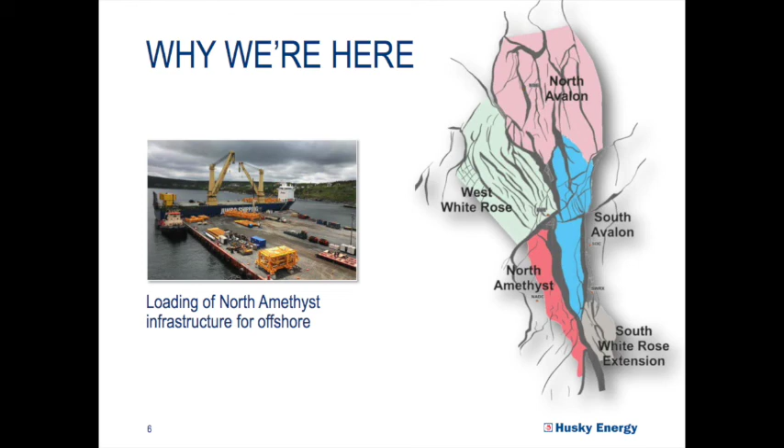We're doing something different in the West White Rose, and now we'll start talking about some of what we're doing different. The public review process has already been mentioned. We're in the 90-day public window of review. Your comments, both submitted on the website and submitted in these sessions, this being the fourth of four, will be used. The report will be prepared by the Harris Center. It'll form the basis of hopefully a recommendation by the board to the governments to approve our development plan. We would anticipate that approval, assuming our process goes forward smoothly from this point, later this year.

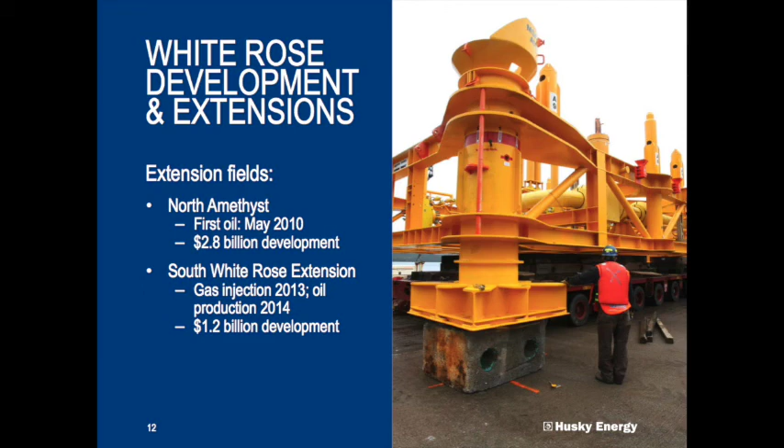The two extensions: I mentioned the extensions to the south - North Amethyst, May of 2010, a $2.8 billion development. South White Rose extension, in 2013 we put in half of it, and then this summer we're putting in the second half of it. But again, these are subsea extensions.

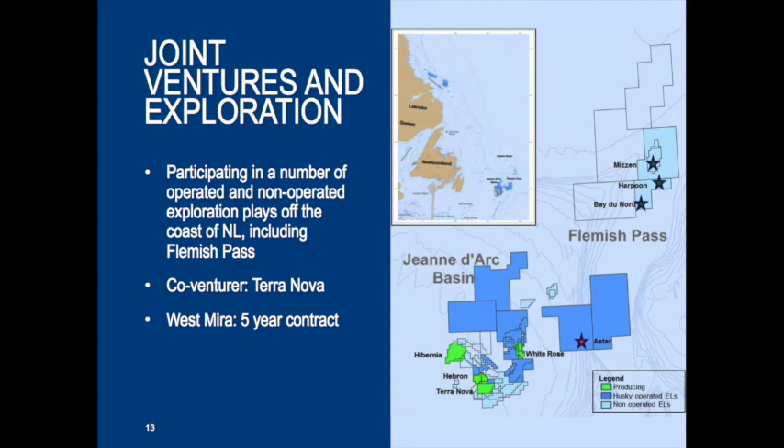We also have several other things going on. We're a partner in the Flemish Pass discovery with Statoil. You can see it here on the slide. We also have recently signed a 5-year contract on the West Mira, which is a new build rig that's coming hopefully next summer to the region to drill wells in the basin.

Another important part of it is not only how we deal with our daily operations, but it also gives us guidance on how we design our facilities. We call that process safety, and it's something we incorporate into our day-to-day design. So when we're looking at building something, it gives you guidance on the process safety, how we build that in such that it will be operated and function properly for the safety of our environment, people, etc.

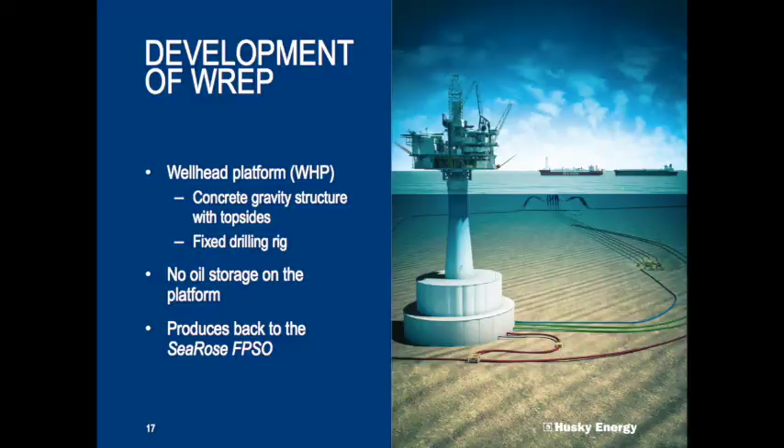There will be living quarters on it, there will be people living on it. A key difference, as highlighted on the slide, is there's no oil storage in this facility. The current facilities that exist, Hibernia for example, Hebron being built, they have oil storage or will have oil storage. We have no oil storage. Why? Our oil will transit over to the FPSO and be processed there. We don't need additional processing facilities, we don't need additional storage. It's already there. So that's a distinct difference between what we're doing and what the other projects are currently working on.

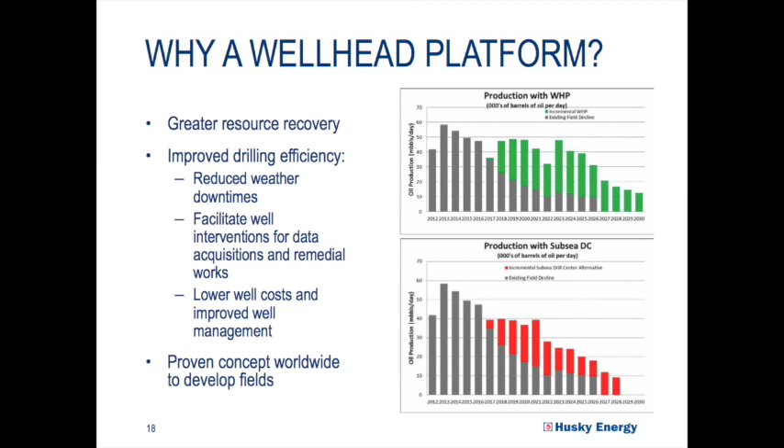Obviously, wellhead platforms are not a new concept. We're using it a different way here on the Grand Banks - that's our plan, but these are proven concepts. The wellhead platform is a proven concept that's been used around the world for a long time.

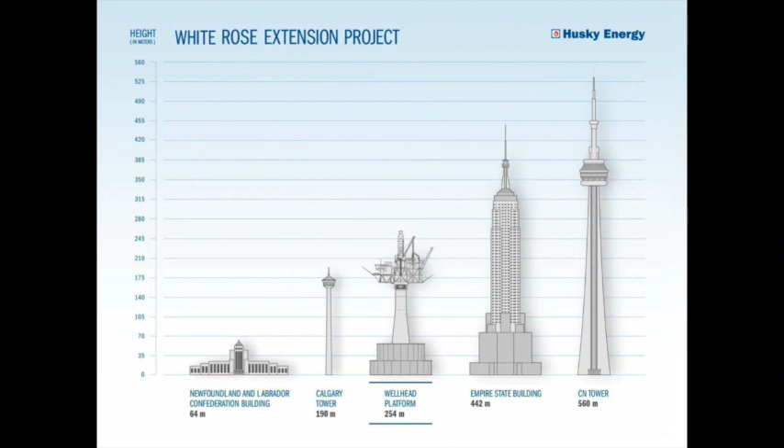Size of the wellhead platform - it's 254 meters, and you can see how that compares to the Calgary Tower immediately to the left on the slide, and the Empire State Building. So 254 meters, it's a very tall structure.

Another thing we like to talk about is the schedule - when are we going to do all of this? We've commenced construction of the graving dock, which we call early work. I'll reiterate, the project has not been sanctioned. We do not have full formal approval to do the project yet. We're progressing part of that process, but we did get approval to kick off the graving dock down in Argentia - basically the large hole in the ground where the graving dock will ultimately be built - and that has commenced construction and is currently ongoing.

Upon seeking approval of the development plan in late 2014, we would then kick off construction of the CGS - the structure that the topside sits on - and then construction of the topsides. Then significant work would be done in the summer of 2017, when we envision taking the CGS to the field, bringing the topsides to the field, mating them, setting the topsides on top of the CGS, and getting that facility up and running to commence drilling late 2017, hopefully starting our first well. So that gives you an idea of the schedule, what we're trying to achieve with our timeline.

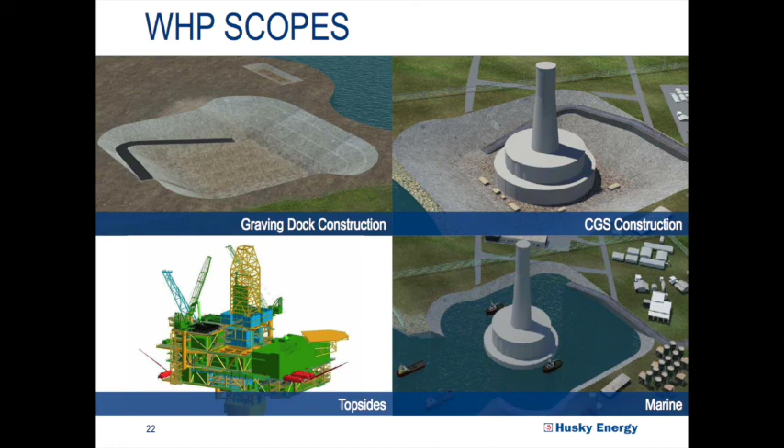Okay, so what is it we're doing? Well, there's 4 major scopes for the wellhead platform project: graving dock construction, and once the graving dock is completed, we'll be building the CGS totally in the dry in the graving dock in Argentia. We have topsides facilities, and of course the marine, which is a bunch of scopes put together and labeled just marine.

Each of these scopes have significant benefits for the province. So the construction phase, project benefits, project management, the White Rose Extension project. Management team is located here in the province. Full and fair opportunity - we have a commitment to provide full and fair opportunity for consideration to local suppliers.

First consideration - supplier development will arrange supplier forums so the local business community can learn about procurement opportunities. And procurement and contracting - the procurement offices of Husky and its contractors will be located here in the province.

Husky and our contractors are committed to the principle of first consideration for the residents of the province to be employed on the project. We will identify and develop programs related to industry. We also understand that there are certain skilled trades that are difficult to get due to the competitive market. So we'll work with our stakeholders and put on short-term training programs as required to gain those skills if we need specific skills for the project.

We also hire work-term students. We cooperate with the MUN Engineering Co-op program. Currently, Husky has a total of 39 work-term students hired, and 6 of those students are working directly for this project.

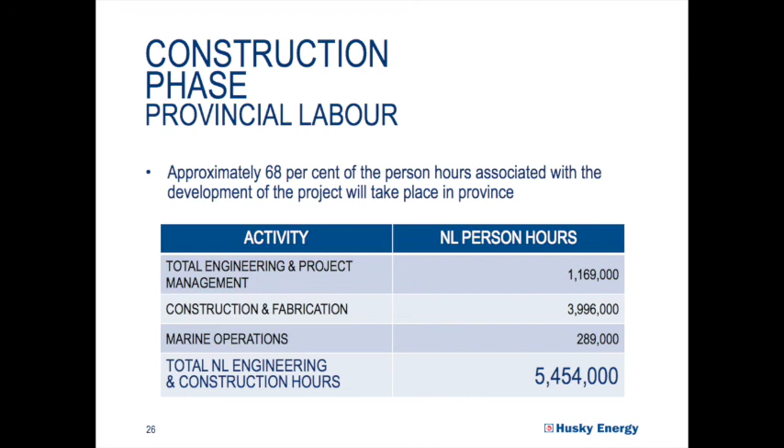So the graving dock is the first step in our project. This was tendered last year and awarded to a contractor in October of 2013. Work has been progressing through the winter. Obviously it's been a very challenging winter this past year, but we are making good progress.

The site is excavated behind a natural coastal berm separating the ocean. The blue dotted box is the area of the graving dock that we are excavating, and it measures about 172 meters by about 148 meters. Just to put in perspective, that's like 6 football fields total area. So it is a fairly large dock, but it is what we require to get the CGS out once it's constructed.

So we've got to move a lot of material, a lot of excavation, up to the tune of 1.4 million cubic meters of material - quite a lot of material. Once all that material is out of the hole, we have a big hole that we need to control water in. So we have a total of 83 deep well pumps that will be installed to help control surface water and groundwater.

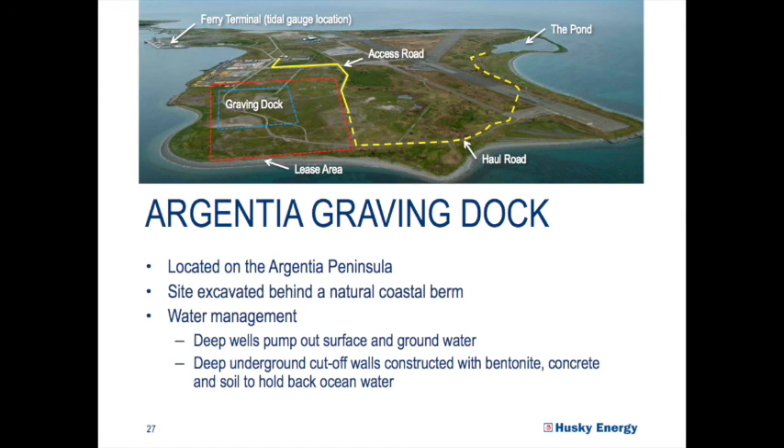But also we need what's called underground cutoff walls. These will be soil cement bentonite walls deep underneath the surface, to 28 meters in one location for the cutoff wall for the C-bund, and another wall which will be 40 meters deep under the ground for the dock gates, which I will talk about in a moment.

So benefits for the Argentia graving dock. Obviously the reusable dock gates - these are permanent infrastructure made from concrete, which is reusable, so there could be future projects in this particular dock. We have done site infrastructure upgrading already to date - we've brought in water, electrical power, high-speed internet, for instance.

There's opportunities for Newfoundland workers and companies right now on site. Presently, there's well over 100 people on site, and over 75% of those are Newfoundland and Labrador residents. And also in the area, there's about 30 local companies supplying the project, plus spin-off benefits. So you can imagine as people that are down there working on construction, they're buying gas, they're in the restaurants, hotels, renting houses, etc.

So a bit on the dock gates. As I stated, these are permanent infrastructure for the graving dock. The total opening width of the dock gates is 148 meters. To put that in perspective, the Scotia Centre downtown would take about 3 of those on its side, end to end, to plug the width of that dock opening. So these gates are a very significant piece of infrastructure, 25 meters high, and a total volume of concrete, 22,000 cubic meters. So really a project in itself.

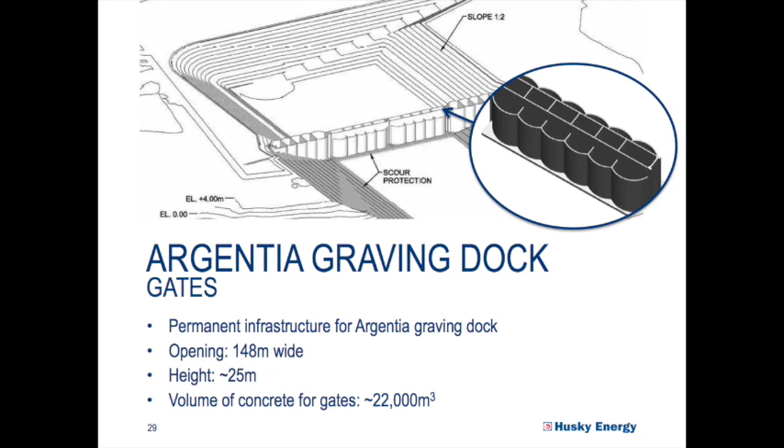These dock gates are not being constructed with the graving dock contractor, but will be constructed by the CGS contractor, which will be awarded later this year.

So the CGS is basically the base of the facility. The concrete structure will be built totally in the dry in Argentia. It'll reach up to almost 136 meters, and it will be brought offshore and is the base for the topsides, which will be installed later.

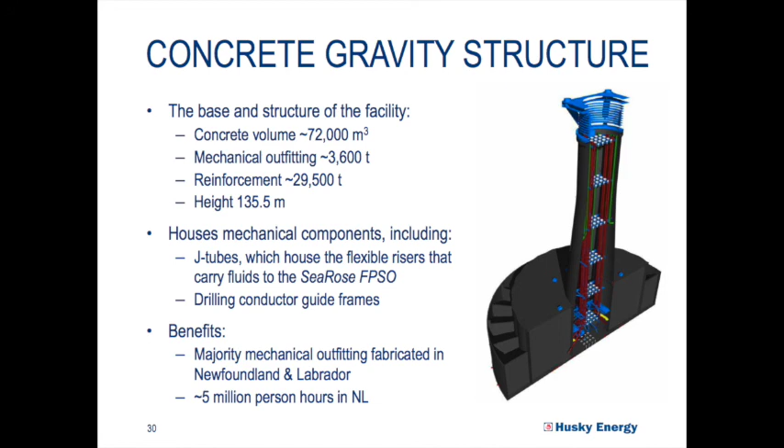The mechanical outfitting is what we call all the steel structure, components, piping, and so on that is inside the shaft. It's almost the circulatory system for topsides. We need to get fluids from topsides to the SeaRose and SeaRose to topsides. And we also need facility for drilling, so that's what the drilling conductor guides are for. The majority of that mechanical outfitting will be fabricated in the province, and all in, we're looking at about 5 million person hours in Newfoundland and Labrador.

So the topsides, which goes on top of the CGS, is a fully integrated structure. The deck area is about 40 by 72 meters.

The facility will include the drilling facilities, but also we need utilities, so that's power generation, fresh water generation, compressed air, those types of things. There will be well testing, which is a regulatory requirement for the facility. Metering, we need to measure flow, and we're designing the living quarters for 144 people on board who will work on the facility.

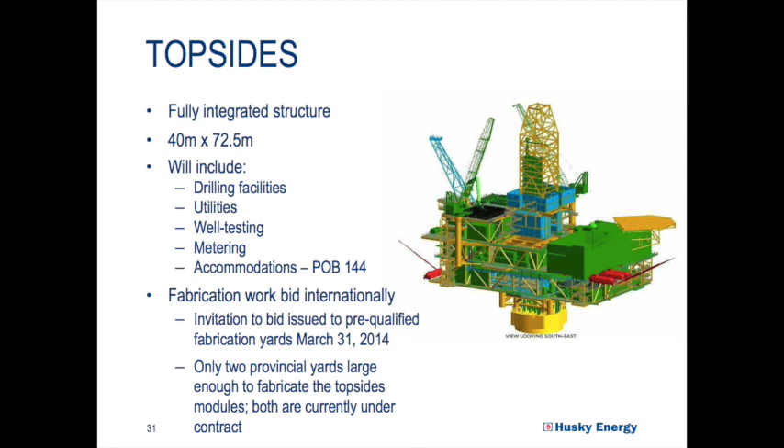The fabrication work is being bid internationally. The tender invitation to bid was actually issued on March 31st. There are 2 provincial yards that have constructed and fabricated large topsides modules, but just for information, both of those yards today are under contract to another project.

There are, however, 4 major local components on the topsides that will be fabricated in Newfoundland and Labrador. They are the lifeboat stations, the living quarters, the helideck, and the flare boom. These 4 items altogether would contribute to about 200,000 person hours of work in Newfoundland and Labrador.

Husky has already gone ahead and tendered the living quarters as well as the helideck due to schedule. We want to get that out a little bit early. It's some major work that we wanted to get moving. The lifeboat stations and the flare boom will be tendered by the topsides fabricator, whomever that is, at a later date to a Newfoundland company.

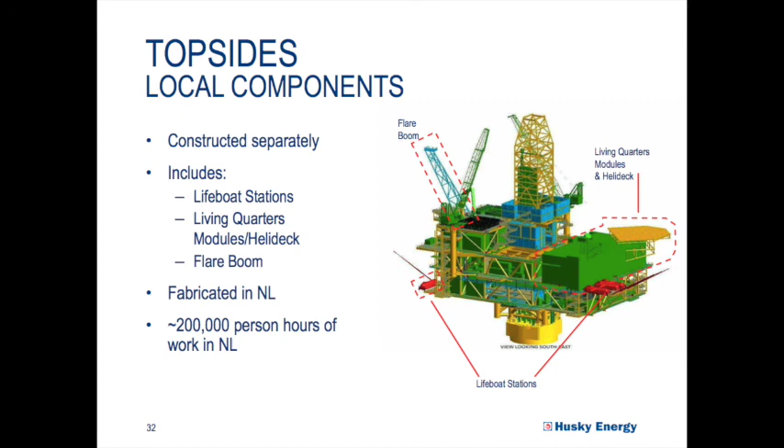The final scope of the project is the marine operations. So it is, as I mentioned before, made up of several scopes. One is, once the CGS is completed in the graving dock, we will remove the C-bund, remove the dock gates, and we'll bring out the CGS and tow it to the field, which is about 350 kilometers east of St. John's.

The topsides, we do not know yet where it will be fabricated. Again, it is a global tender, but there is a marine component to ship the topsides from that yard, wherever it is, to Newfoundland. When it comes to Newfoundland, the topsides will then be transferred to a brand new vessel, the largest installation vessel in the world, called the Pieter Schelte. The Pieter Schelte has the ability of bringing this topsides from Newfoundland offshore and installing the topsides on the pre-installed CGS base, which has already been taken out at that time.

So a little bit on the Pieter Schelte. It has over 240,000 tons displacement, 382 meters long, and 571 POB. This vessel is being built by a company called Allseas, and by all means you can Google their site and get more information, pictures and video on this new vessel.

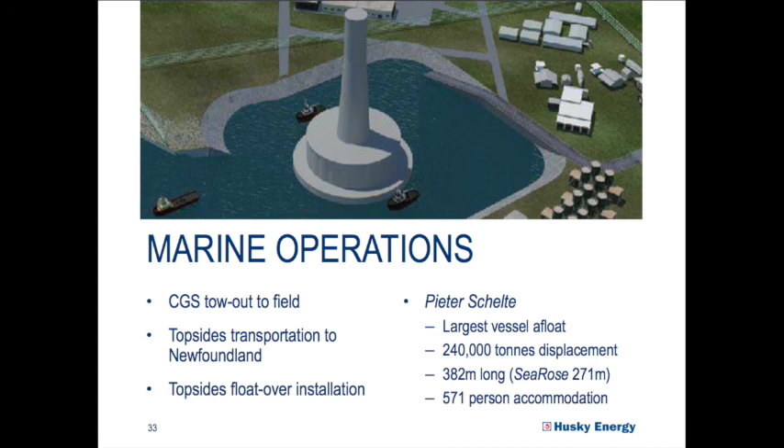For over 30 years, Husky Energy has been a leading explorer and developer in the Newfoundland and Labrador oil and gas industry. Building on the success of its current operations in the White Rose field, Husky, along with its co-venture partners, has commenced the planning and development phases of the White Rose Extension Project.

This project will be developed using a wellhead platform, which will be tied back to the SeaRose FPSO. The wellhead platform will serve as a fixed drilling rig and will be located approximately 350 kilometers southeast of Newfoundland and Labrador, in the White Rose field.

Construction on the concrete gravity structure, or CGS, is taking place in Argentia, Newfoundland, located 134 kilometers from the capital city of St. John's. The Argentia site covers an area of 50 acres. A significant engineering feat, the construction of the graving dock and the CGS will require approximately 5 million person-hours.

Excavating a graving dock is the first step, which begins with the construction of the cut-off walls, deep underground walls that protect the dry dock from ocean waters. An integrated dewatering system controls water in the graving dock.

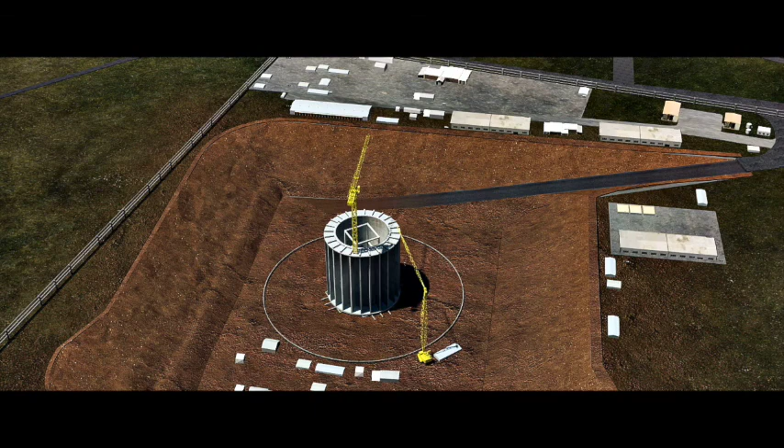Cranes will then be erected and slip forms used to build the concrete structure. Once complete, the CGS will stand 136 meters high, comprise 7,300 cubic meters of concrete, and contain 3,500 tons of mechanical outfitting.

148-meter-wide concrete dock gates will allow the graving dock to be reused in the future. Once the CGS is complete, the dock gates will be removed and towed away from the dock. Tugboats will then transport the CGS to the White Rose field, where it will be installed on the ocean floor.

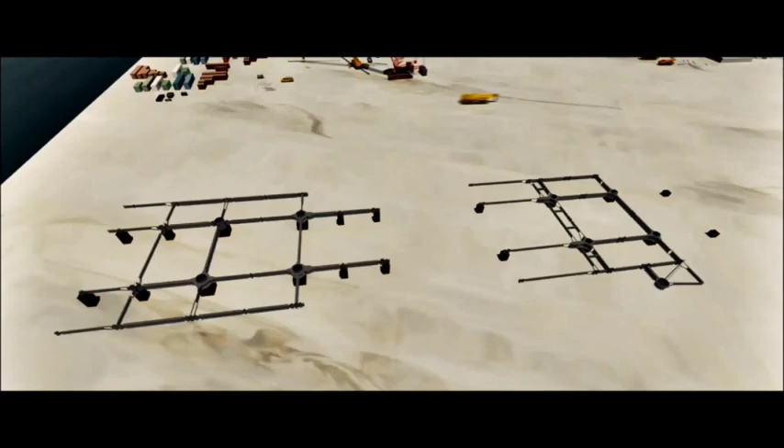The topsides will be an integrated structure consisting of drilling facilities, accommodations, utilities, a flare boom, and helideck. There will be a cellar deck, middle deck, and drilling deck constructed at the same time, which, when completed, will be joined together.

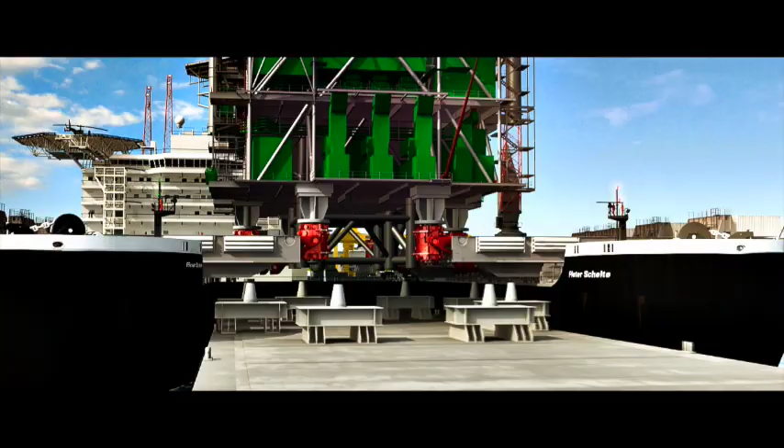Once the topsides are finished, they'll be transported to Newfoundland waters. The topside structure will then be transferred to the Pieter Schelte, the largest platform installation vessel in the world. It will carry the topsides to the White Rose field for installation atop the CGS.

The technology behind the wellhead platform is the first of its kind in this region and will help open up new options for field development. An important step in extending the life of Newfoundland and Labrador's oil fields, and in creating opportunities and benefits for all.

So I hope the video gave you a little bit better understanding of the complexity and how the things we're talking about tonight all fit together. I think it helps us all just to look at the whole process and understand that it is many facets and a significant piece of work.

So I'll move on now into our next section and talk a little bit about the subsurface. We've really talked up to this point about what goes above the seabed, the stuff we're building, and we'll talk a little bit now about the subsurface, where the hydrocarbons are coming from that we'll ultimately be producing or intend to produce.

So we talked about our existing production, the production that's already been produced from the field. That has come from some 34 wells we've already drilled that are producing back subsea. Those wells are located in the South Avalon, the North Amethyst tieback that we've already talked about, and future wells will be located in SWRX, which is the southern tieback.

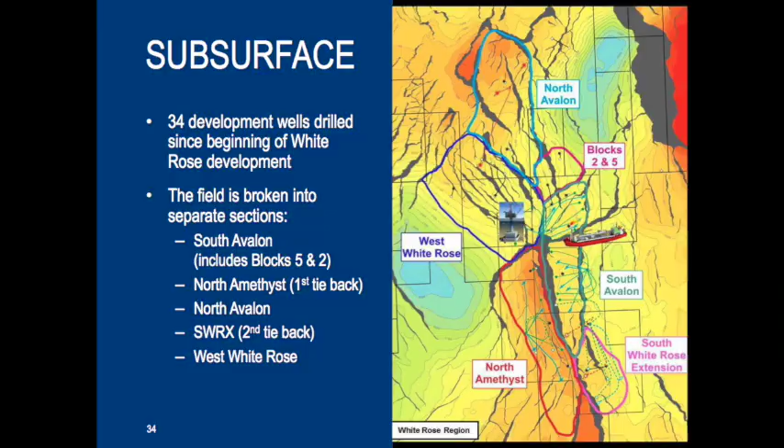So how many wells are we going to drill? I just mentioned we've drilled 34 wells in the field. Our base plan is to drill 38 wells from the wellhead platform, though we have the capability to drill 40 wells. I would anticipate a high likelihood that we'll drill every well we possibly can from the platform, which would be 40.

Roughly half of those wells are going to be producers, and the majority of the rest will be water injectors. So we're going to be producing hydrocarbons out of the reservoir, and to replace voidage in the reservoir, from a reservoir management perspective, we inject something back to maintain reservoir pressure. In this case, we'll be injecting primarily water, and we'll also be re-injecting the gas that we produce from the field.

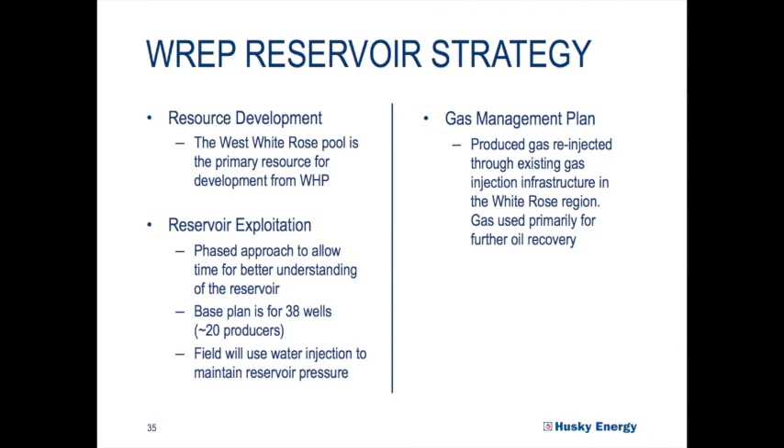Relatively moderate resource quantity here. 115 million barrels is the amount of oil that we anticipate recovering from those some 38 wells that I just mentioned. So it's a reminder to me that we're talking about big investments for our facility, but relatively moderate resources. It reminds me, and I frequently remind the team, the discipline that we need to have executing the project, because we need to be disciplined on both our cost and our schedule to achieve recovery of that kind of oil and ultimately make money on it.

Drilling safety systems - the good thing for us is we've drilled a lot of wells out here in this field, so we know the field very well. Our technical people know it well, our subsurface folks know it well, our drillers know it well. We understand the pressures we're dealing with, and we're very familiar with drilling wells here. That's a huge advantage for us developing this field.

In addition to that, we have the luxury of building our own facility with a rig on it, and then the required safety systems that we believe need to be in place to ensure that we have a safe operation. So that's something that we're incorporating into the design of the topsides, including the rig itself.

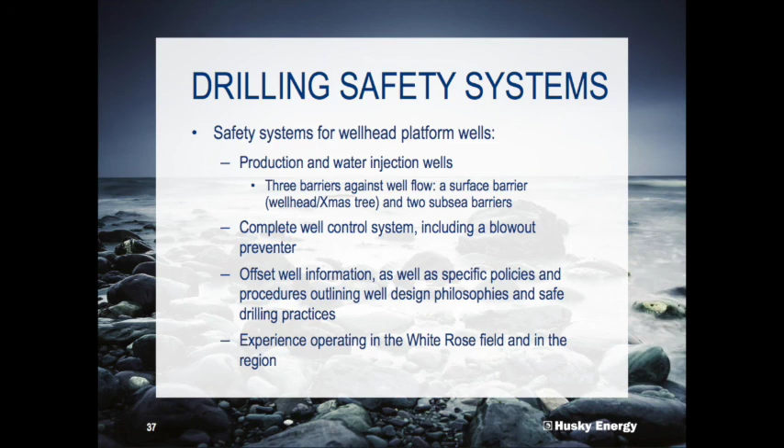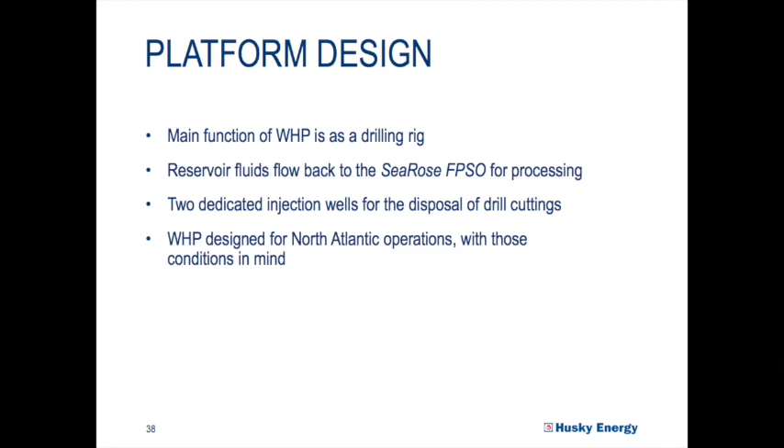We've talked about a lot of the benefits. I'll hit the operational benefits here real quickly. So we've got a lot of activity going on during the construction phase - we're going to be building a lot of stuff, a lot of these things that Derek's just talked about. In addition to that, we're putting a facility in place that'll be there for years into the future, 25 years into the future. So we're creating permanent jobs on that facility - there'll be 288 permanent jobs on the facility.

And then we will also have significant direct and indirect employment associated with additional people being employed to support that ongoing operation, which will go on for years. And then we'll also have specific drilling activity going on. As I mentioned, it's a drilling rig, and then it's also going to be a producing facility. So we have 18.5 million operating person hours that we've calculated as an estimate, a significant number of person hours.

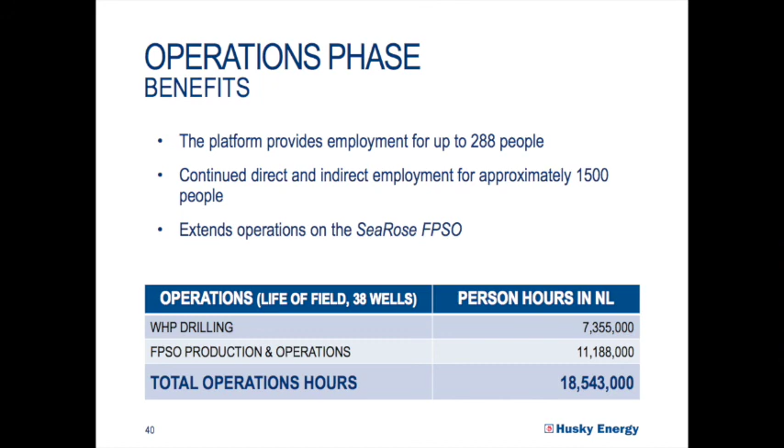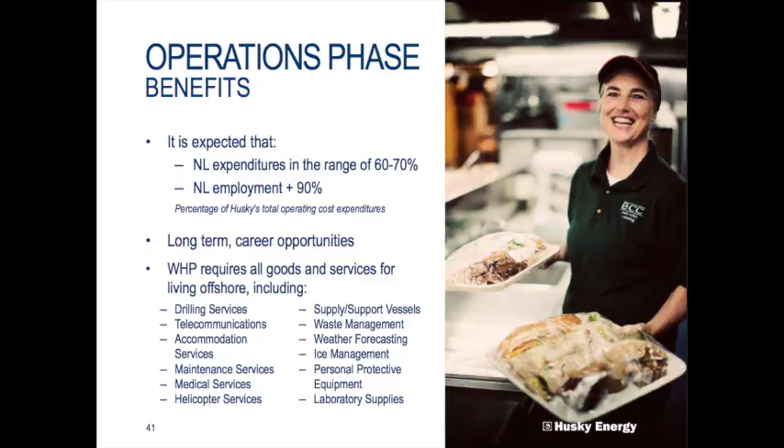Okay, next we'll look at the socioeconomic impact statement and sustainable development report, which will be referred to as SEIS. The SEIS looks at the potential impacts of our project on the local communities.

So the positive effects are expected to contribute positively to employment, local businesses, increase government revenue, and develop technical expertise and skills in the province. The Argentia, Placentia areas and St. John's will see increased direct, indirect, and induced benefits.

Negative effects expected to be minor in nature and within capacity of existing services. There's one area that we're continuing to monitor, and that's the housing requirement in the Placentia area. Once we have a contractor on board, we'll know more definitively the construction schedule and the number of people and the peak manpower demands we'll have in Placentia. And we'll continue to monitor that to ensure that we have sufficient housing.

Next is the concept safety analysis. The purpose of the CSA is to identify risks of the development.

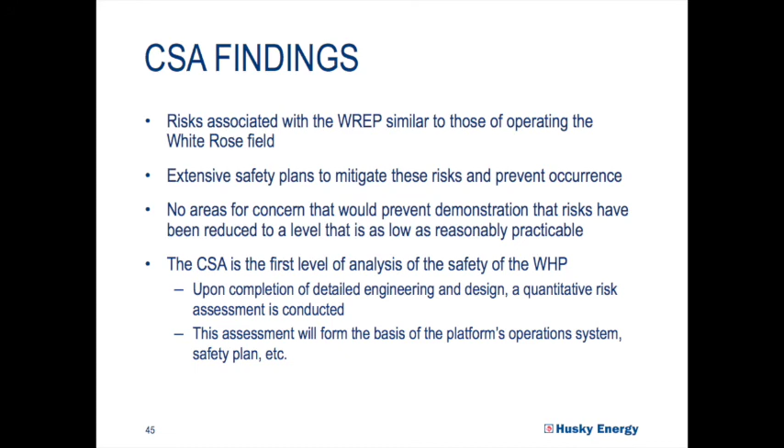For the operations phase, the platform will have a specific environmental protection and compliance monitoring plan for the life of the project.

Okay, that really concludes the DPA portion of the presentation.

There is another video here we'd like to show. This video was produced last year by our offshore folks to give the onshore Husky folks a better appreciation of what it's like to work offshore on our FPSO called the Sea Rose. As you'll see in this video, and I'll narrate a little for you, you'll see a lot of safety practices and procedures, but more importantly, people actually doing drills and practicing those things, not just documents that are written and not looked at again. So if we could just give that a roll.